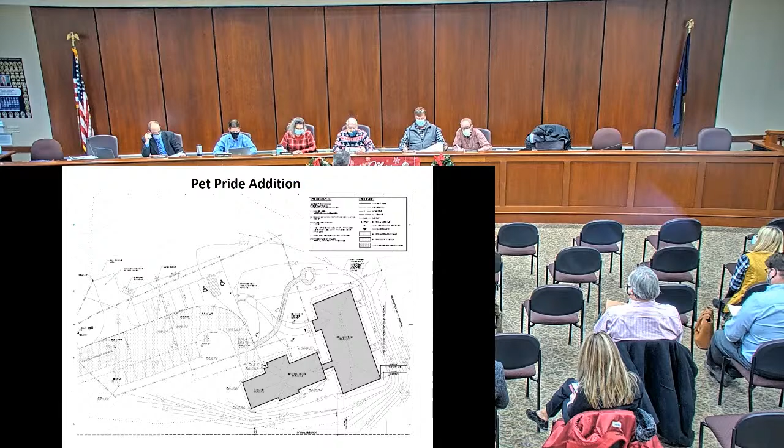We do have a resolution on this one, unless the board has anything. Okay, the resolution is for Pet Pride Addition, 7731 State Route 251. Today's date, 12/14/21, application number 38 SP 2021 and 09 SU 2021. Whereas the planning board made the following findings of fact, and there are 15 of them.

Whereas the Town of Victor Planning Board reviewed the unlisted action on December 14, 2021, and identified no significant impacts. Now therefore be it resolved that the project, Pet Pride Addition, will not have a significant impact on the environment, and that a negative declaration be prepared.

Now therefore be it resolved that the application of Pet Pride of New York, Inc., site plan entitled Pet Pride Addition, drawn by McMahon LaRue Associates, P.C., dated September 2021, received by the Planning Board October 5, 2021, last revised November 4, 2021.

Planning Board application number 38 SP 2021 and 09 SU 2021 be approved with the following conditions. Conditions to be addressed prior to the chairman's signature on the site plan: 1, that no final signature will be given on the plans until all legal and engineering fees have been paid, as per the fee reimbursement local law adopted November 25, 1996. 2, that the comments in a letter dated November 9, 2021 from Labella Associates be addressed. Ongoing conditions: 1, that the site plan comply with the Town of Victor design and construction standards for land development, including Section 4. 2, that a building permit be obtained before the start of construction. And be it further resolved that the Planning Board Secretary distribute the Planning Board's approval letter.

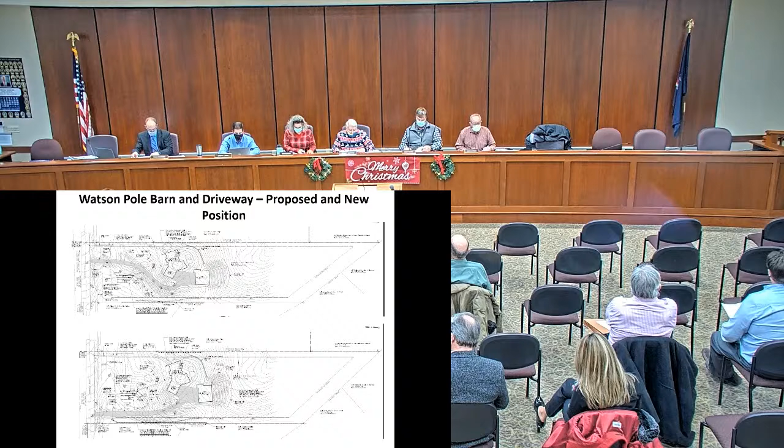Yeah, it's just me tonight. Abe and Denise are out of town, so they've asked me to come. We drew up the plans. I'm Glenn Thornton with Thornton Engineering.

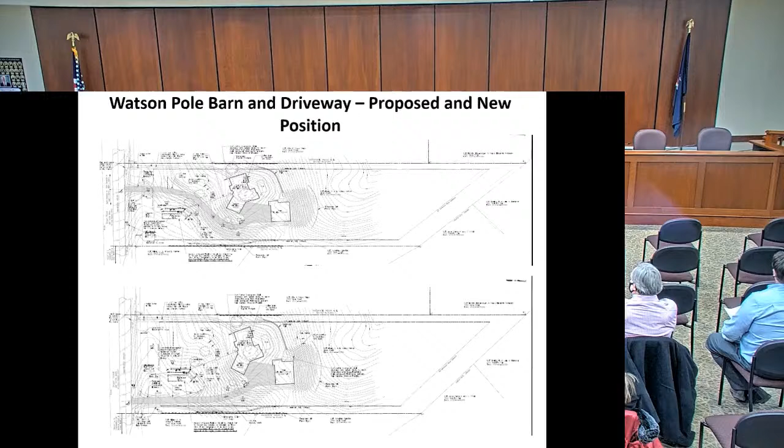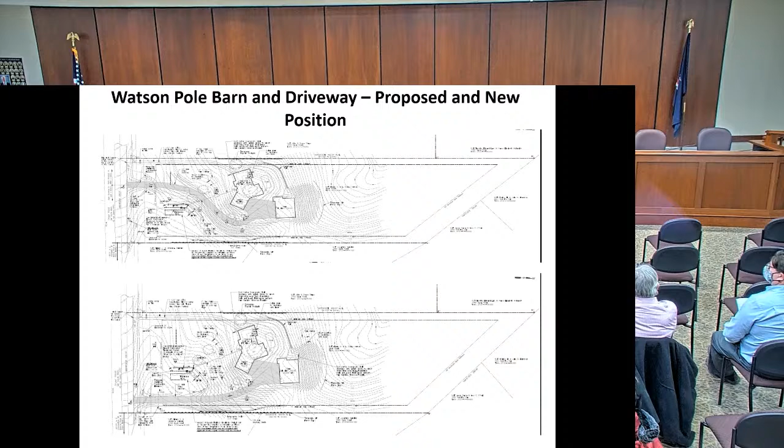I was not here at the last meeting, and they tried to fill me in on the discussion. As I noticed, there's no meeting minutes yet, so I understand there were some comments about the cobblestone structure next door, plus there were some town engineer comments. We responded to all the comments that we had received back on December 2nd. I don't know if everybody's seen the response letter and revised set of drawings that we prepared, but I think we've answered everything that's been asked. Not sure if there's any other questions, concerns, or any other information that's needed.

Well, there was a question on... Yeah, so I was going to talk with our geotechnical professional at Labella regarding vibrations from the result of constructing a driveway, and what impact that might have to an adjoining or nearby cobblestone building, and also about placement of the driveway. Currently where the driveway is depicted is a much better position than if it were located further to the west. So I think the furthest east you can move that driveway would be the safest for people traveling on the roadway, as well as for anybody going in and out of that property.

And understanding that there is a concern with regard to creating that driveway and the impacts to the adjoining parcel, it's likely that there may be some vibrations experienced that might impact in some way, to some degree. We can't say, I don't know. It might impact that cobblestone building, right? If you're inside that building, it's likely that you might experience some vibration from the construction of that driveway.

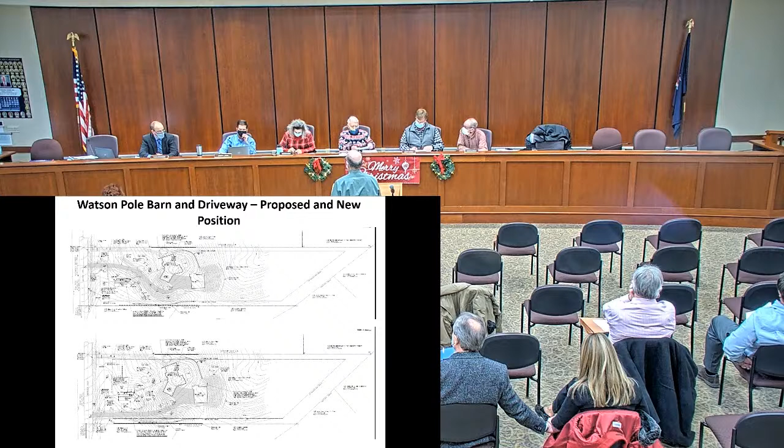So another opportunity would be to monitor potential vibrations that might come from the heavy equipment creating the foundation for that driveway. That can get expensive—it can be a few thousand dollars to do all of this, not only the pre- and post-construction survey, but also the ground monitoring. Especially if that monitoring is done remotely, it's going to be a little bit more. So those are things that can be done. It's certainly an expense. Whether or not it's something this board has the ability to impose upon a developer—and in this case it's not really a developer, it's a property owner looking to construct a single-family home—is that the right thing to do?

It seems the adjoining property owner of the cobblestone building has the ability to do their own pre- and post-survey as well, a condition survey.

Wes, one thing I came away from the last meeting, and I still have a question about, is if we do any sort of monitoring, how do we know when it's too much? What's the measure? Clearly there's an extreme when parts start falling off the cobblestone, but how do we know when it's too much?

I think that's going to require consultation and dialogue with the professionals that actually do that work. I don't know the answer to that.

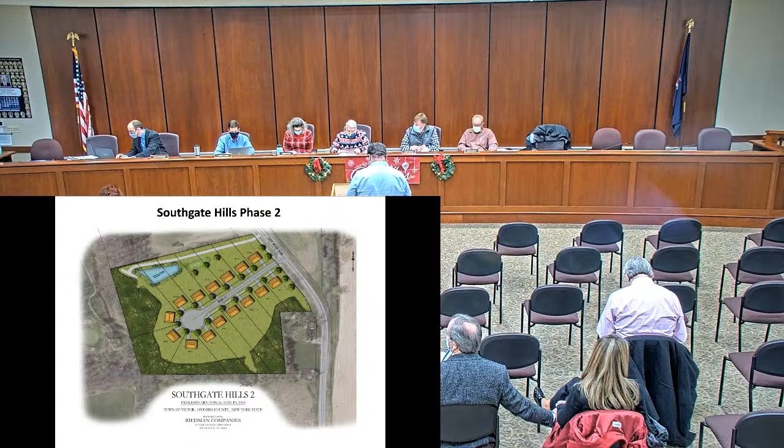The public hearing on this one is still open. This is 06 PS 2021, East Victor Road, Zone Residential 2, owner BRW of Greece LLC, tax map 28.04-1-48.000. The applicant is requesting approval to construct 15 lots on 10.14 acres under the clustering provisions, which will include all associated utilities and stormwater management. Approximately 3.99 acres will be placed in a conservation easement. This will be the second step in a 3-step process for a major subdivision. The sketch plan was acknowledged complete August 10, 2021.

Link, go ahead. Good evening. Link Swedrock with BME. Jerry Watkins with BRW of Greece LLC is with me as well. I think last time we were here, the big issue outstanding was Labella's review of the pump station. We were talking about closing the public hearing and doing SEQR at that time, but the board was requesting some more sewer information from Labella. So I think that's where we were at, and we're here to answer any other questions we can on that.

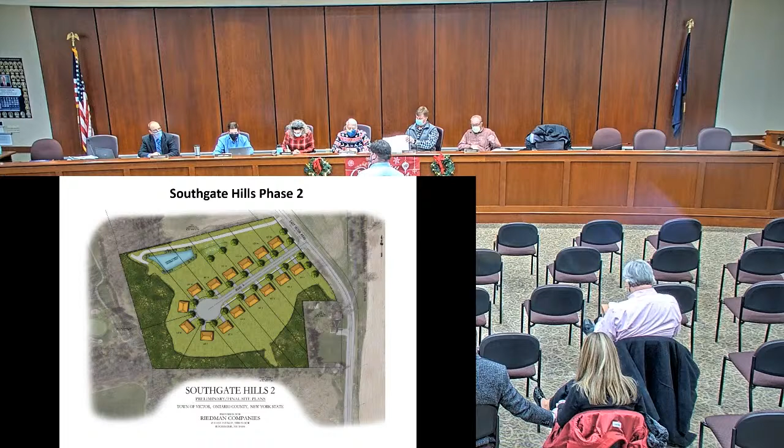We have seen a draft resolution. We do have a comment or two on it, but I think we better talk about sewer first, right? Sorry. Yeah, that sounds good.

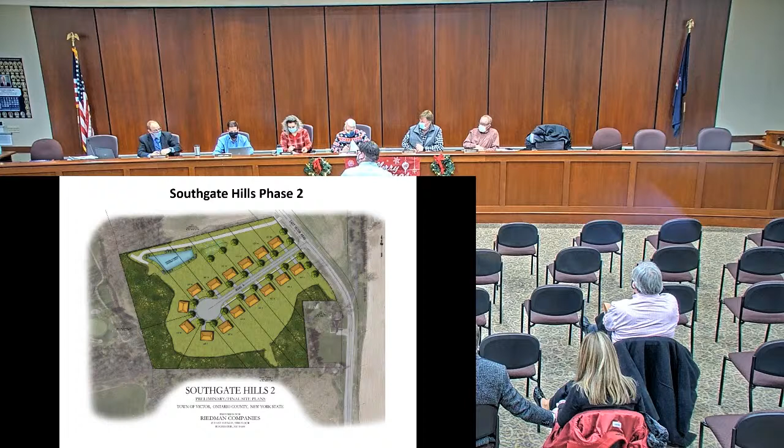So Labella conducted an updated evaluation of Pump Station 7, which is at the corner of East Victor Road and New York State Route 96. As you have heard in previous meetings, it was understood that Pump Station 7 was at capacity as a result of the approval of Victor Jeep and Bluemont Rise subdivision. So we requested some updated pump run times from the Town of Farmington, and we also looked at as-built plans from Pump Station 7. Labella found that the pump station is discharging its flows into a 6-inch main. It was previously thought to be 4-inch, so that provided a little more wiggle room for additional flows.

We also evaluated the existing flows as of today. We looked at pump run times between January 2020 and October 2021, and we took a look at the anticipated flows from this project. We're also taking a broader look at the tributary area of Pump Station 7, other areas of the town that could contribute flows to it. Ultimately, we found that as the station stands today, it can accommodate 15 additional homes from this portion of Southgate, just the 15 homes on the west side of East Victor Road. So that's not a problem, provided the station is adequately maintained and the connections are watertight, with no additional inflow and infiltration.

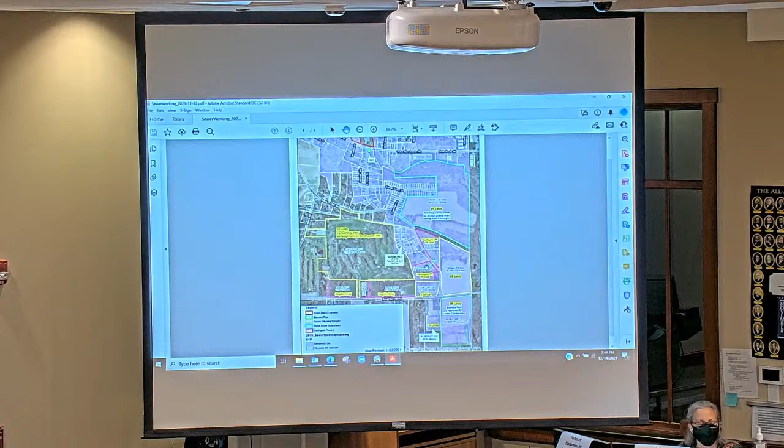So what I'm hearing you say, Wes, is as long as everything is built out, as long as we don't approve any more than what's already been approved, including this particular application, the pump station will handle it. And even if they don't get a capital project together to update that pump station before these are all done, we can't approve another project on this line until they do upgrade that pump station.

That's correct. So anybody that comes forward and says, I want to put 10 houses, 50 houses, whatever it is, and tie into that station, you're going to say, well, you got to wait till we get a capital project completed. That's correct, unless you want to pay for a new pump station. So that's the two options. That's what I'm hearing. Yeah.

We're okay approving, it sounds like, what's in front of us here, but we can't do anything until that pump station's upgraded, even approve it with the plan of nothing hooking up to it until it's updated, because we don't know when it's going to be done. Nice to have it done next year, if that's the plan.

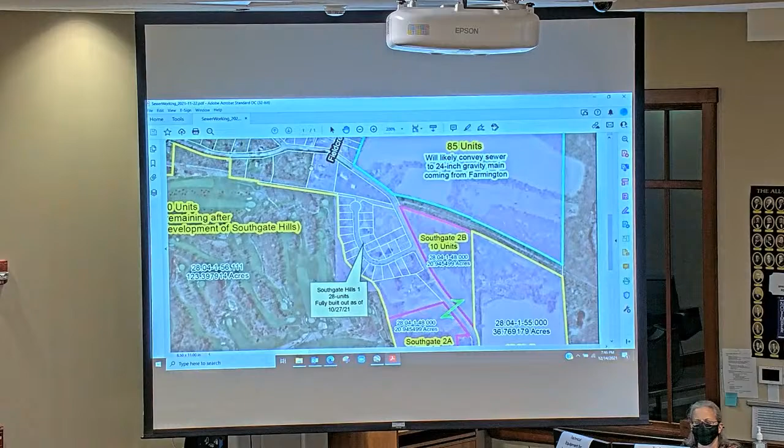Sometimes plans get delayed, so that's my summary of how I understand it. Yeah, I think that's right.

I appreciate, Wes, you checking all that out, and what I also want to make sure I understand is, they just built this trunk line all the way down to Bluemont. Correct. That's plenty big enough to handle anything that gets dumped into it between there and 96. That's my understanding, yeah.

But with that line just recently installed and with these 15 homes that are going in, it's maxed out until something changes, right? The pump station's maxed out, correct? So you couldn't accommodate any further users connecting into that trunk main beyond Bluemont.

Yeah, it'd be a mess over on 96. That's exactly right. That's exactly right. All right, so it's... got that, Link? This is it for a while.

The other thing I just wanted to chat about with the planning board is the sidewalk issue, which I believe we did discuss at the last meeting. So what I understand now, currently, what's proposed is a sidewalk in this development, lining the street.

And then I think they've also proposed a sidewalk, and now it hasn't been engineered yet, but I think they're also proposing that it come up here to Southgate 1 and terminate at this location, where it would then connect with an existing sidewalk that goes up to the Auburn Trail at this location.

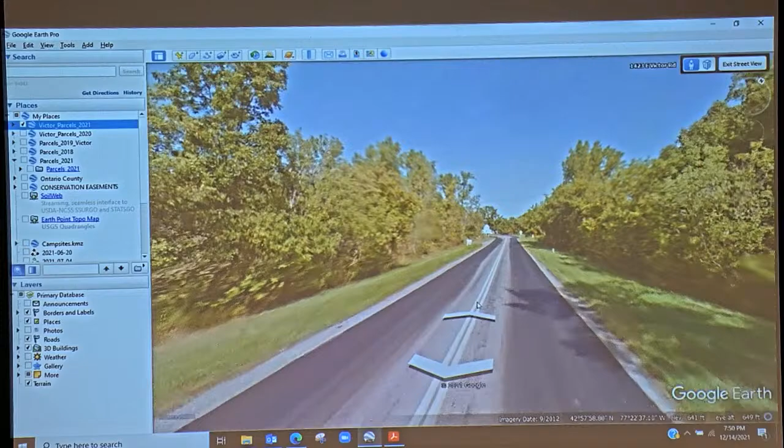Wes indicated that the stretch of Auburn Trail from the subdivision to East Victor Road isn't the most pedestrian-friendly. Would you be interested or willing to maybe improve that if we were to go with your proposal?

I'm not understanding, what are you saying, Wes? So Wes indicated that that stretch of the Auburn Trail between East Victor Road and the subdivision access was not the most pedestrian-friendly and could be improved.

Yeah, in front of the three houses, three lots that we have? Let me just exit the street view here and zoom out. Maybe I'll just go back to this.

So my understanding, and the last time I was out at the trail, this portion of the trail in this area, right? The rock surface was a little bit larger than like your stone dust trail, and there's a bit of a slope here coming down. Unless conditions have changed, it seems like maybe the flatter, more accessible route might be along the frontage of Southgate 1 to get to the trail.

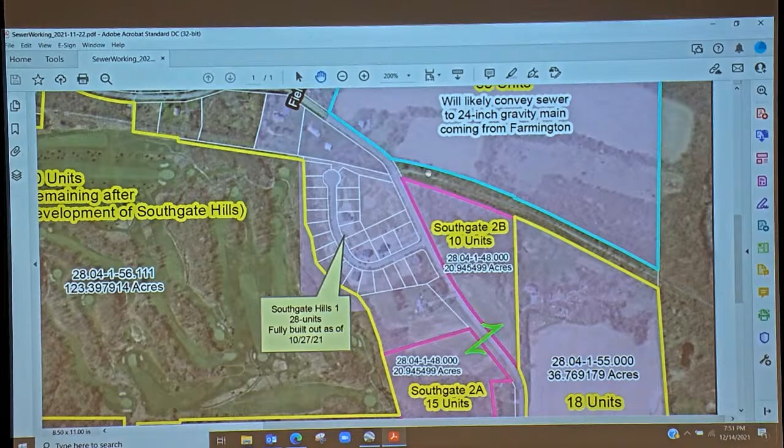So then I tried to bring up the... Yeah, that's not stone dust trail, we're like number 2 stone up that slope.

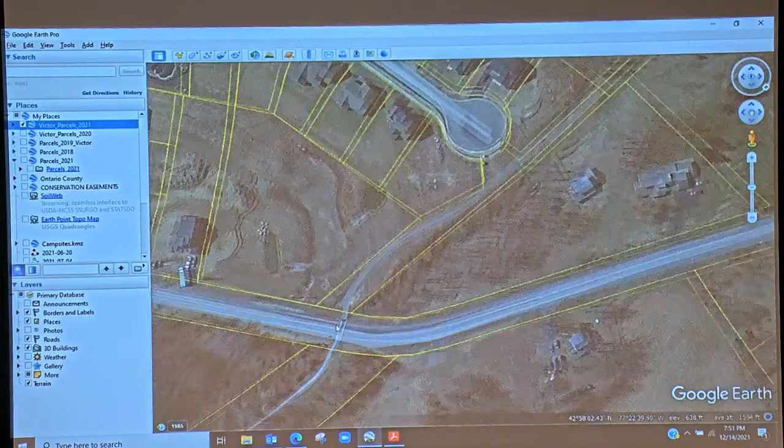Probably the town did that. I think, I think the town did that. Yeah, I think we gave you the property and the town put it in. South, the first phase of Southgate.

Right? Mm-hmm. Anybody know how used that trail has been since it's been there?

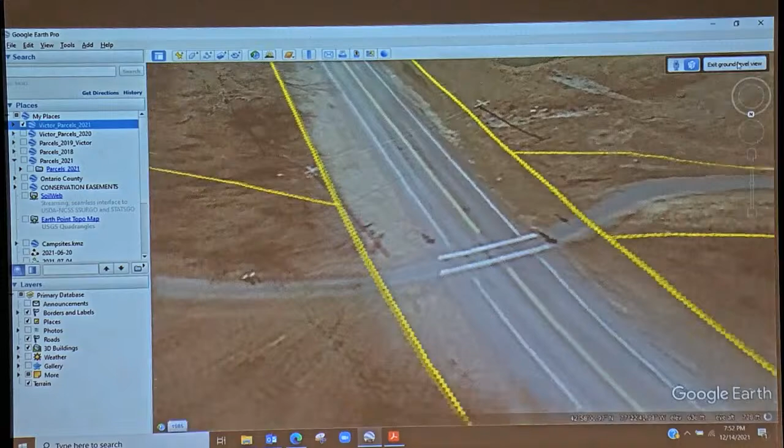So what you're saying, Wes, is the three lots that front East Victor Road, here's a profile of the road, there's no shoulder? Well, there's probably a shoulder. I was just looking to make a safer route, right?

You agreed to offer sidewalks along East Victor Road, between Southgate 2 and Southgate 1. You offered that, and maybe it might make sense to go another 500 feet and extend along East Victor Road for consistency and a direct path to the Auburn Trail.

Yeah, well, in all of our discussions that we've had, it's always been to go through section 1. I guess I'd suggest that if they go ahead and do Southgate 2B, we look to see how we can connect everything across the road at a good sight distance, and perhaps from Southgate 1 across to 2B, and then run along there to the Auburn Trail. I think that might be the time to look at it, as a compromise.

In the meantime, they're still providing a connection through their Southgate 1 from that extra stretch of sidewalk. Try to break it up a little bit so it's not all at once. I'm personally sympathetic to that, but I do believe we need to make it as connected as possible. So if and when you come back for Southgate 3 or 2B, we'd for sure be looking for a way to connect all of those, with the extra last piece. Yes, right.

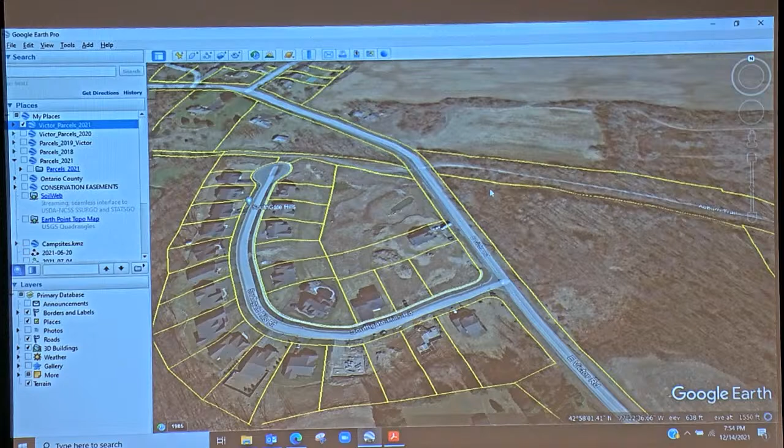We're pretty much done with the 28 lots with section 1. I think we have 2 lots left, so we're now going to start marketing the 15 lots. That should take a year and a half or whatever, but we pretty much ran out of inventory here, so I would think in the summer we'll be back with 2B, or whatever we want to call it, on the other side of the road.

Anything, Joe? Looking at the map, would there be access, direct access from 2B to the trail itself? Or would they have to cross the road and go up?

There's a sidewalk in section 1. So they'd have a sidewalk all the way down to the sidewalk in section 1, and the sidewalk connects to the trail at the end of the cul-de-sac. Yeah, we've got a connection there. So they could walk through the subdivision, using the sidewalk.

Well, the other thing, once you get this for 2B, just come along the road, or wherever that road comes out, tie into the Auburn trail right here, so you don't have to cross the road until you go to a straight crossing.

If you remember the plan, we were trying to do a parking area over there and give that corner piece to the town. So it might make sense to do a crossing there, bring the sidewalk on that side to the parking area. We'd originally done an area that we were going to give to the town in that corner by the trail, and then maybe it would make sense to incorporate that with what we do over there, so that you're connecting to that parking lot, and you could go either way.

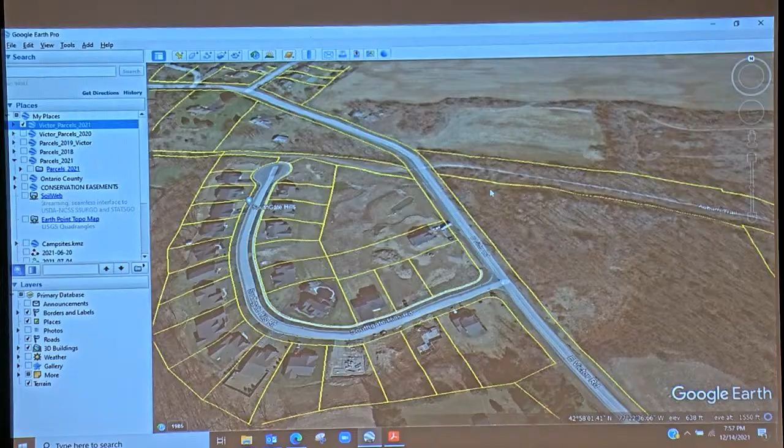David Wright, 33 Ketchum Street, Chairman of Victor Hiking Trails. Back in August, we met with Brian Emelson from Parks and Rec and reviewed the entire plan of all the phases, and requested sidewalks where we think it made sense. We requested going from Southgate Hills 2 all the way along East Victor Road to the trail, because if someone in that development wants to go to Mertensia Park, they're going to take the direct route.

And that would be the way I would go. I'm not going to go through the development, up the hill, back down the hill, to cross at the crosswalk to get to Mertensia Park. So from a safety standpoint, and knowing human nature, I think it would be best to have the sidewalk along East Victor Road all the way to the trail.

I'm not sure about the history of the trail in that section, as I wasn't involved when Southgate Hills 1 was proposed. I know originally there weren't sidewalks. The planning board asked for sidewalks. We have sidewalk on one side, and that's great. And we do have the connection to the trail, and that's great.

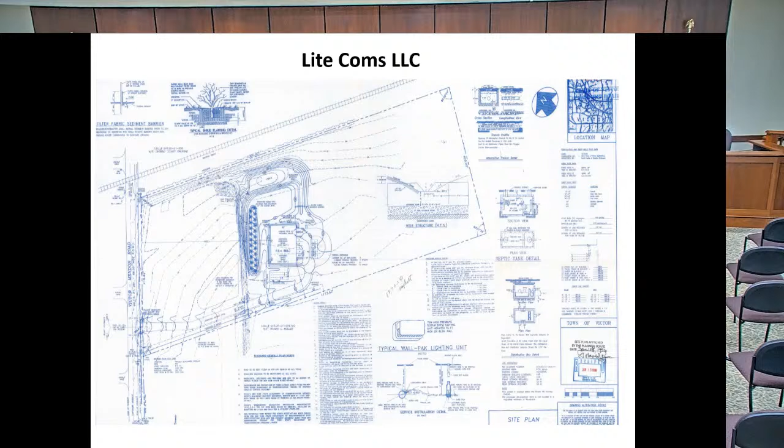The next one is Lite Coms, and I think, Scott, you're recusing yourself on this one? Myself from that one, yes. All right, Lite Coms LLC, it's 43 SP 2021, Zone Light Industrial, 7321 State Route 251. Owner is Rekha Golkar. Tax map 15.00-1-9.111. Applicant is requesting approval for a change of use from warehousing to a manufacturing business. Hours of operation would be 7 a.m. to 5 p.m. Monday through Thursday, and 7 a.m. to 12 p.m. on Friday.

Anybody here for that one? Step right up. I'm Bob Jacobson with Lite Coms, and we are looking to relocate into this building during the month of January. We did receive some questions which we provided answers to yesterday morning on number of people and square feet.

We have that in our materials that were received this evening. Everybody had a chance to look at it? I haven't. I'm curious what kind of satellite communications equipment you make, or you assemble? We make ground terminals. I mean, they look similar to like a DirecTV kind of dish, a small dish. They range from 3 feet to 6 feet, and then we package up the electronics that make it work.

We don't do real manufacturing. We do what I call light assembly. Our suppliers are all around Ontario County. The chassis are made in Manchester. The cables are made in Farmington. The circuit boards are made in Victor at Sermotech, and then it all comes into our building. We populate the box, test it, and ship it.

What kind of truck traffic could we expect with parts coming in? Most of it is FedEx and UPS trucks once a day, just the small trucks, not big semis or anything like that. Our terminals, the beauty of our terminals is they're small. They pack up in suitcase-sized boxes that people can check on board an aircraft, and we typically ship one day a week, so we would have a truck coming once a week for shipping, probably less than a warehouse that's in there right now, I would guess.

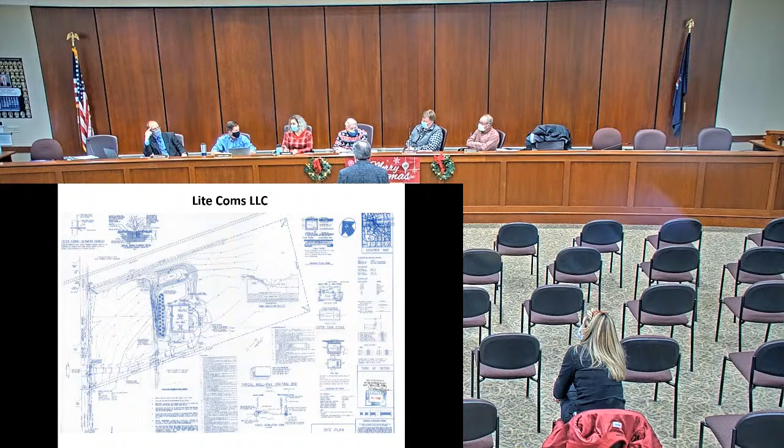I was fine with this, no further questions. Good. Okay, so am I. Welcome to Victor. Thank you. Do not have a resolution for you. Yeah, do we? Where? So we do. Okay.

I guess we should close the public hearing. Think of a motion? So moved, Joe Logan moves to close the public hearing, Joe Lindbeck seconds. All in favor? Aye. 3-0, and 1 abstention.

The resolution for Lite Coms LLC, change of use, 7321 State Route 251. Today's date, 12/14/21, application number 43 SP 2021. Whereas the planning board made the following findings of fact, and there are 6. Whereas the Town of Victor Planning Board reviewed the unlisted action on December 14, 2021, and identified no significant impacts, now therefore be it resolved that the project, Lite Coms LLC, will not have a significant impact on the environment, and that a negative declaration be prepared.

Now therefore be it resolved that the application of Andrew Coloratolo, site plan entitled Lite Coms LLC, received by the Planning Board November 8, 2021, Planning Board application number 43 SP 2021, be approved with the following conditions. Conditions to be addressed prior to the chairman's signature on the site plan: Number 1, that no final signatures will be given on the plans until all legal and engineering fees have been paid as per fee reimbursement local law adopted November 25, 1996. Number 2, that comments in a letter dated December 8, 2021 from the Code Enforcement Officer be addressed.

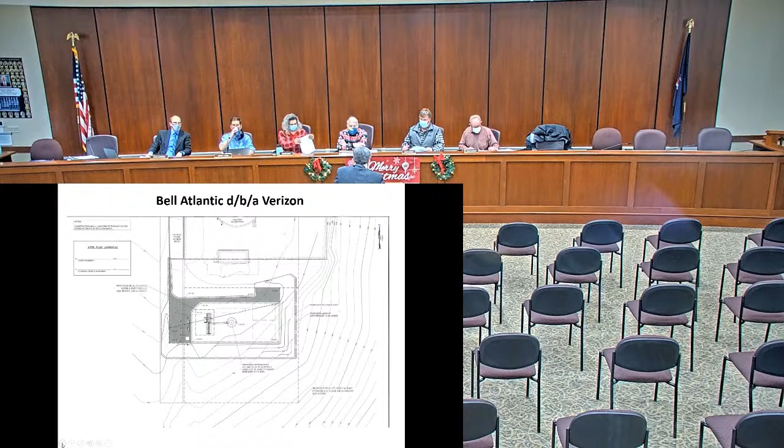Okay, thank you, good evening. Robert Bergdorf, the law firm Nixon Peabody, here tonight on behalf of Verizon Wireless. Also with me tonight, for the record and available to answer questions in their respective areas of expertise, are Kathy Pomponio, the project manager with Verizon Wireless, Michael Crosby, an RF engineer with Verizon Wireless, and Colin Fazio, a site acquisition consultant. This is an application for municipal approvals for relocation facilities for what we call the Victor South relo site. More specifically, a 140-foot monopole next to the MCWA water tank on Victor Holcomb Road.

Previously, Verizon Wireless had its antenna on the water tank. MCWA had Verizon come off of it for tank maintenance onto a temporary pole, and for a variety of reasons, as more particularly set forth in Exhibits G and H to the application, Verizon Wireless is not going back on the tank.

Similarly, we understand T-Mobile may have also sent a letter, and I just want to get that in while I'm thinking about it, that they intend to also co-locate on this tower that we're proposing, and they also are coming off the tank. So we're proposing a 140-foot monopole right next to the MCWA parcel, which requires a special use permit from this board, the planning board, but also a setback variance from the ZBA.

So I won't get into the setback. We've already been in front of the ZBA, but just wanted to note that we're in front of them for that issue, which is a distance from the property line. And just to note quickly, the reason that we are close to that property line is to consolidate disturbances. If the landowner let us move further out, we don't care, but typically, most towns, and it's an APA rule, you consolidate disturbances. You got a water tank, you get your tower as close as you can to the water tank. You got a tower, you need a second one, get them as close together as you can.

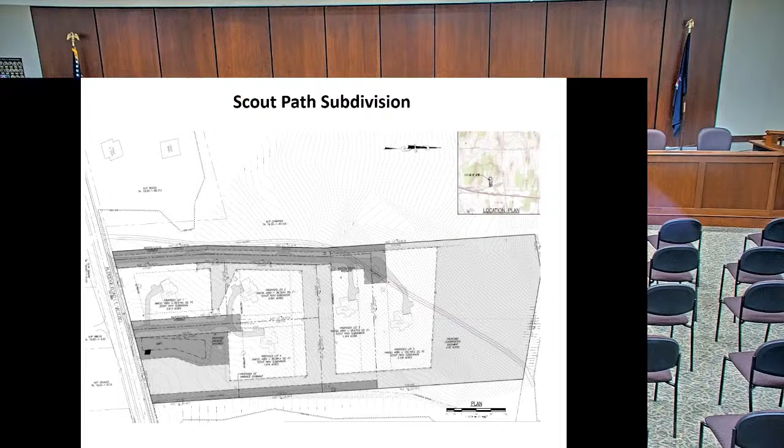All right, well, happy holidays everybody. This is our first time here for final. Maybe you recall this project has been here previously as sketch about a year ago in February, and in preliminary, we finished that August 10th. So this is about the 6th time we've talked about the project. It's gone through some changes. Recall the configuration was shifted at preliminary when we worked hard to avoid what was ultimately discovered to be an environmentally sensitive area, one which would be better protected in a conservation easement than as a residential building lot.

So what we have is the final configuration. I believe we're very close to a plan here that addresses all the comments. We did get some comments today from the town engineer, they seem fairly technical, but nevertheless it looks like we still have just a little bit more to do to get this home. If that's the case, we'll pause right here, answer any questions, and see where we go.

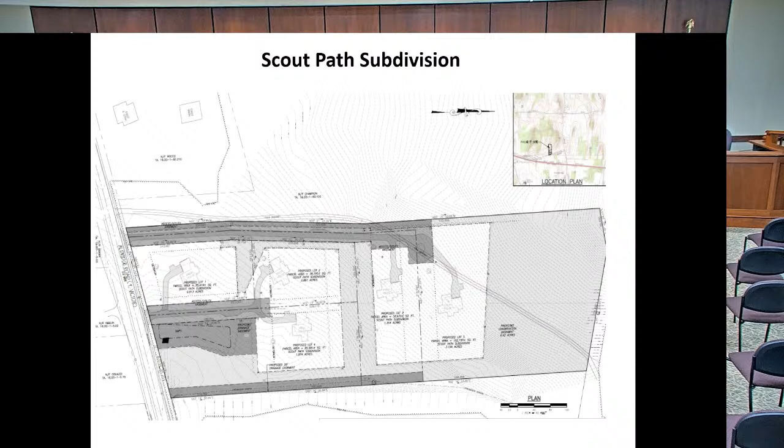Let's go first, you've got the plan. I guess I'll go first. Were there some town engineer comments generated that were in our packet, or were they separate? You probably didn't get them in your packet. I can go over a few of those. Why don't you go over those first, and then I... Sure.

So we had a total of 10 comments on the final subdivision application. Some of them are kind of carryovers from the preliminary application.

So the first comment was about access management. There's really nothing further for the applicant to do. We acknowledged this during the preliminary application that he was seeking a waiver to section 55-6, the 440-foot driveway separation. The riverine wetland.

So we talked about the wetland at the last preliminary phase, and then I believe the town submitted the wetland delineation and information to the Army Corps of Engineers. I don't know if there's been any response, and I don't know if either Kim's office or Scott have heard. I would say here, wasn't expecting anything, Wes. Typically we would only have correspondence with the Corps if there was an actual delineation we were working toward some determination with. So in this case, I think the silence speaks for itself, in that the avoidance coupled with the delineation, or lack of delineated wetlands, speaks for itself. Yeah, okay, not a problem there.

The sanitary sewer availability - the only point we were trying to get across was that I think the narrative and some of the submission materials indicated you had this sanitary sewer availability letter. We didn't see it. I don't know that it's actually needed for the application. It's not anything that I would feel holds up the process here.

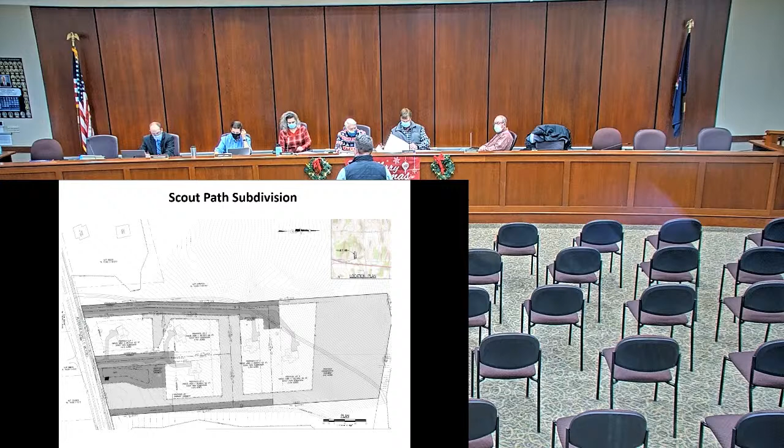So it sounds like maybe that can be addressed on the plan set. It definitely can. I'd just remind that the technique we're using here is directional drilling, so on one end of the drill it's actually at surface. There's no excavation required. The drill extends deep to grade, and then it daylights only in one excavated hole on the sewer side. At that location, based on depth, we will need some trench protection. It's fairly deep, so we're talking about a disturbance in the range of 6 by 10, and it would be excavated, connected, and restored in the same day. So the erosion control we'd be proposing would probably just be surface restoration and stabilization.

The sanitary lateral slopes - there seemed to be just an inconsistency. There was one note that mentioned 1% versus 2% on another note. Yes, I think Farmington was requesting 2%. Is that possible? Yes, and that's what we've detailed on our profile, is 2%. So we've proven the concept there that we've got sufficient grades and elevations to do a 2% drill. Okay.

I didn't read the information into the record before we started, so I should do it now. This is Scout Path, Aldridge Road, tax map 16.00-1-2.120, zoned Residential 2, 09 FS 2021. Owner is DeHolliday Design Incorporated. Applicant is requesting approval to subdivide the 8.84 acre parcel into 5 building lots ranging in size from .813 acres to 5.09 acres. Home locations will be accessed via 2 shared common driveways. This is the final step for this major subdivision. Preliminary was approved August 10, 2021.

Sorry, Wes, go ahead. The next comment, number 6, was about proposed conditions in the stormwater pond. We just want to be sure that you're able to get your one foot of freeboard. No difficulty there. Yeah, that's not a problem. All right, that's good.

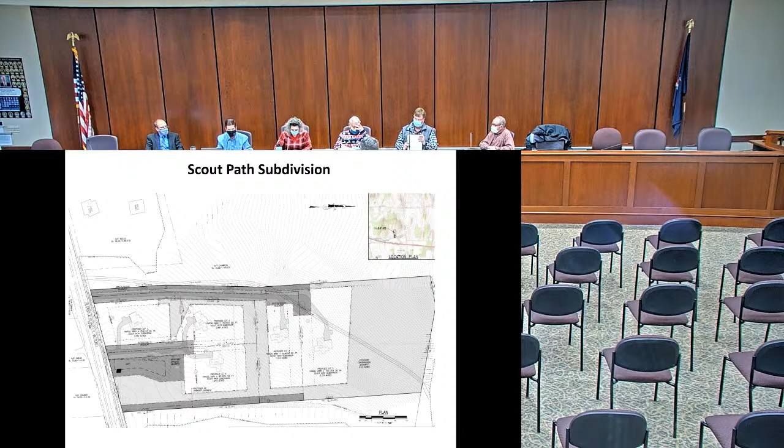Why wouldn't you just have 16 feet paved so you can actually pass cars? Isn't that the town standard, having paved as a driveway section? I want to just be real careful here. I don't want to deviate from the design criteria. What I'm stipulating to is if there's an inconsistency here, we'll dial it in to match the detail. If it's 16 paved, we'll do 16 paved.

All right, I'm sure Wes will update us on what he reviews from these two. But that's all I had, was also the driveway. Yeah, I apologize. It's kind of late, and I turned the plans in a bit ago, and I'm a little foggy on the detail there.

Okay, yeah, so take a look at the detail, Scott, when you get an opportunity, because that it shows, technically, it shows 20 feet of road section, 2 feet of bituminous pavement shoulders. And I don't know whether that's a different type of construction than the 16 feet of actual paved driveway. So, looks the same, honestly.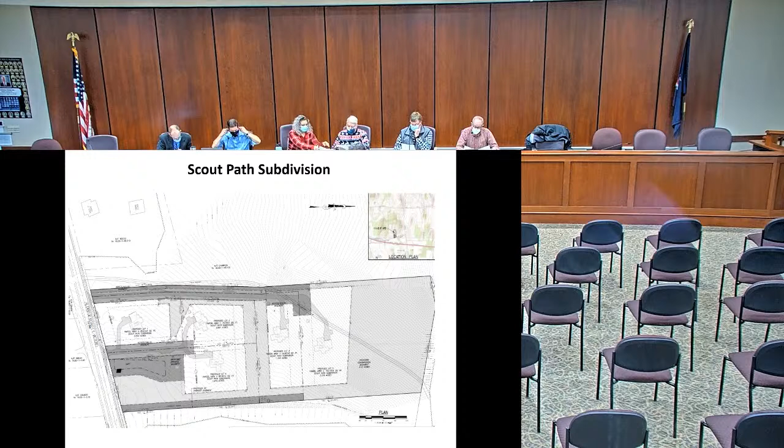Anything else? Nothing? Nothing? Want a couple of minutes to look it over before I read it? Oh, thank you. 5 and 6 are off.

No, we'll have to... I think that can be. Wes is going to add number 7 for you, met prior to chairman's signature, and then we'll talk about the driveway widths, just clarifying that it'll be resolved, that it's probably being constructed per town code.